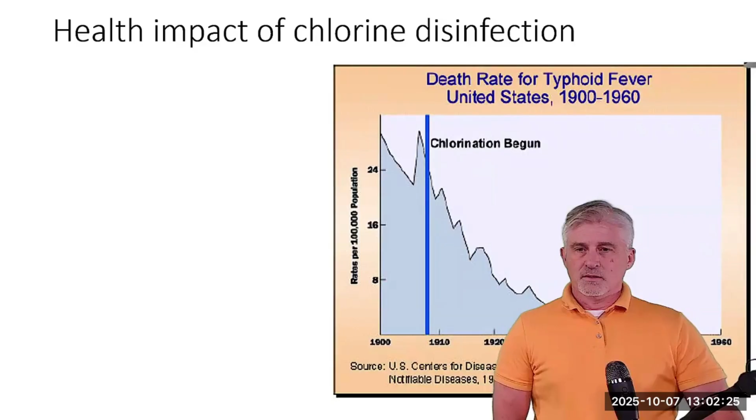So, chlorine disinfection and disinfection byproducts. Why do we add chlorine? You can see from this chart that since we started adding chlorine, there's been a significant decrease in the rate of death from typhoid fever, for example. There used to be thousands of deaths due to waterborne illnesses, but nobody really understood why. In the 1670s, we were first able to observe these microbes using a microscope.

In 1854, John Snow figured out that cholera was caused by waterborne transmission, that it came through the water. That's really interesting. If you can get time and you want to research John Snow and the Broad Street Pump cholera outbreak in London, it was really an interesting thing, and how he determined that the source of this cholera was through drinking water.

In the 1860s, Louis Pasteur developed the germ theory. His theory was that microorganisms such as bacteria and viruses are the primary causes of diseases. Then in 1908, New Jersey had the first system in the US to chlorinate drinking water. You can see where this line signifies 1908. We had some high typhoid fever outbreaks prior, and then through time, with the institution of chlorination in drinking water systems, we've seen that reduce.

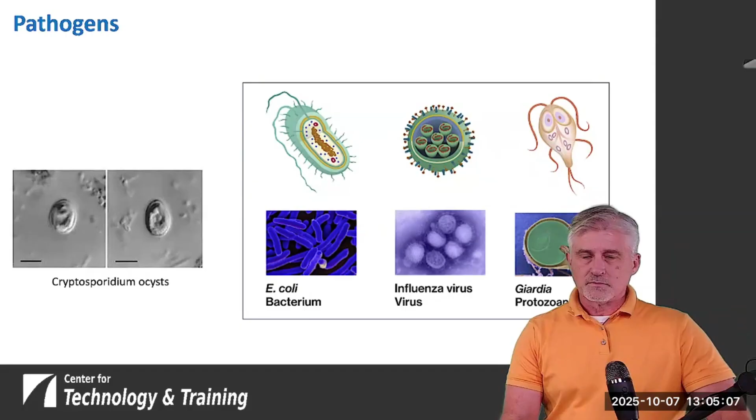So we're using coliform as an indicator organism. The idea is that when we test for total coliform, it's just giving us an idea whether the water possibly contains some of the more concerning things, such as E. coli or fecal coliform. So just because a test comes back positive for total coliform doesn't mean that it's dangerous. It's just an indicator that maybe we need to do some additional investigation.

And now, E. coli has an MCL under the revised total coliform rule. So if you were to have a test for total coliform done, and it came back positive, you would have to follow up with an E. coli test to confirm that you didn't exceed the MCL.

Another method, an indicator that we can use, is monitoring for heterotrophic bacteria. Heterotrophic plate count is an indication of background levels of microbial activity. But once again, it doesn't indicate for certain that we have a problem, it just indicates that there could be a problem.

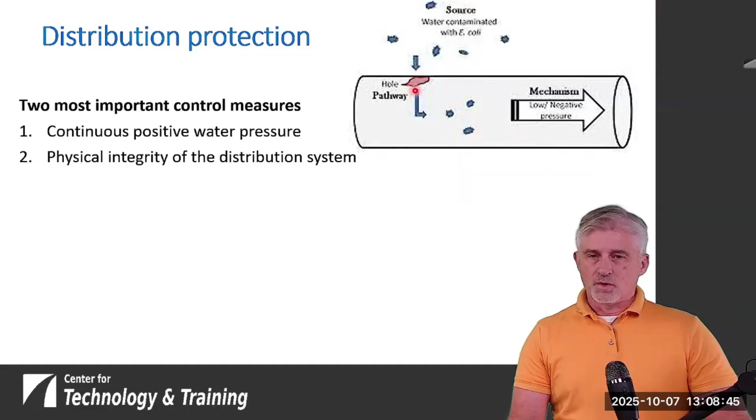And the other thing is to maintain the physical integrity of the distribution system. That means we don't have holes or leaks in our pipes. Even a small crack can provide a pathway for soil containing large numbers of bacteria to enter the system during a low pressure event.

Cross connections are another way that things can enter. If you had some sort of organic that came in, it could potentially be food for any of the bugs that we have. And then a free chlorine residual is the final backup barrier to protect our drinking water if something were to enter through this. So we want to make sure that we've got continuous positive pressure, that our system is tight, that it doesn't have any leaks, and that we have a free chlorine residual.

And the chlorine residual is great, but if we're in a situation where we've got something that gets into our distribution system and we use up all our chlorine, then there isn't any more available to act on any more of the bugs.

All right, so there's three main types of chlorine disinfectant. We've got gas chlorine. Gas chlorine comes in cylinders, it's 100% available strength, and it's a very, very potent disinfectant form of chlorine.

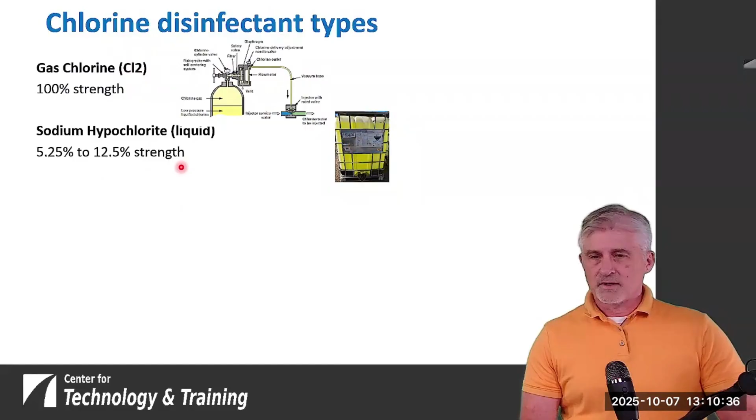We've got sodium hypochlorite or liquid chlorine, comes in these type of plastic totes. They come in 55-gallon drums, and it comes in smaller drums as well. That's usually 5.25 to 12.5% strength. My experience is it tends to be more on the 12.5, the higher end of that.

So free chlorine, when we talk about free chlorine, it's made up of two different things. There's hypochlorous acid and a hypochlorite ion. We'll get into that a little more further about what the benefits of each of those are.

And then chloramines, it's a fourth, it's a little different, it's not actually just chlorine. With chloramines, we're going to take 5 parts of chlorine, we're going to add ammonia to it, and so we're going to measure that as a combined or a total residual. So it's a little different, it's taking chlorine, adding ammonia, and then that's our disinfectant.

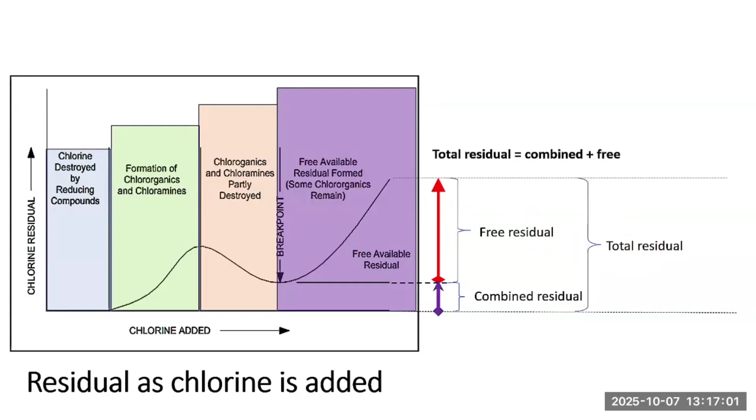Let's look at this in more detail with some numbers. If our dose, what we want to apply, is going to be equal to our demand, and that demand is a combination of the chlorine being used up by reducing compounds plus the combined chlorine, which is the chloramines being affected, that'll leave us with a free residual chlorine. In this case, we dose at 1.5 parts per million. We've got a free residual remaining of 1 part per million, so we know our demand was 0.5 parts per million.

So we're on to our first poll: what dosage should be applied to drinking water with a total demand of 0.4 milligrams per liter or parts per million, if the intended free residual is 1.2 milligrams per liter? All right, we're starting to get responses.

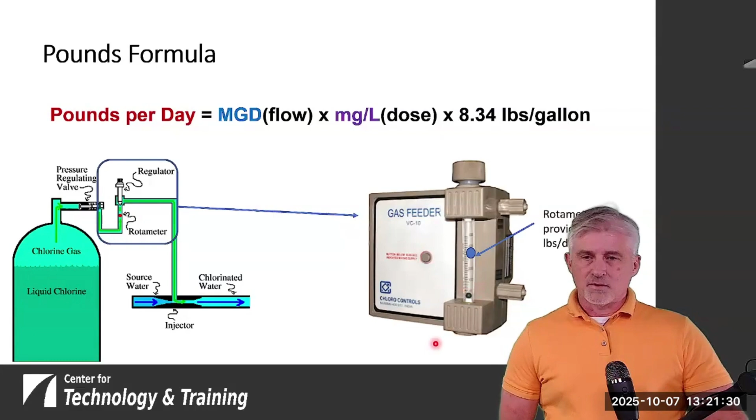So in the case of a gas chlorine system, we've got this gas feeder called a rotameter, and it will provide us the ability to enter in what we want as far as the number of pounds that it will apply in a day. So that's how we work it for gas chlorine. And we can do a gas chlorine feed rate calculation.

So in this calculation, what is the feed rate setting for gas chlorine in pounds per day if the plant flow is 1.2 million gallons a day and the required dosage concentration is 1.5 milligrams per liter? In our pounds formula, we're going to plug 1.2 million gallons per day in for flow, and we're going to have 1.5 parts per million for the dosage, and our 8.34 does not change.

So if we're looking for the chlorine feed in pounds per day, we've got 1.2 million gallons per day times 1.5 parts per million times 8.34 pounds per gallon. We multiply those out, and we get 15 pounds per day.

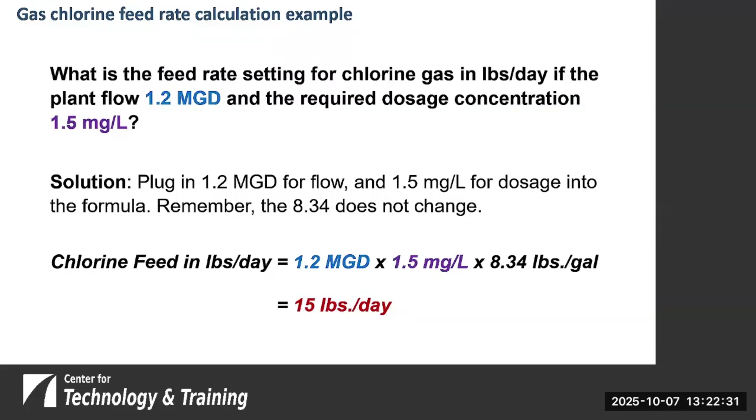All right, so next we're going to look at calculating feed rates for sodium hypochlorite, or liquid chlorine. This is a little different because with gas chlorine, we had 100% strength, so we didn't have to deal with percent strength. We still have the same equation on top, and that's going to calculate the pure chlorine.

The bottom, we're looking at the percent strength. We need to account for the fact that it's not 100%. And then we're going to divide by the weight per gallon, and that'll give you the number of gallons you needed per day. So the weight per gallon in our equation is for chlorine, and for any other chemical, like phosphate, you can use the same formula, but you need to take into consideration the percent strength and the specific gravity of the chemical you're adding.

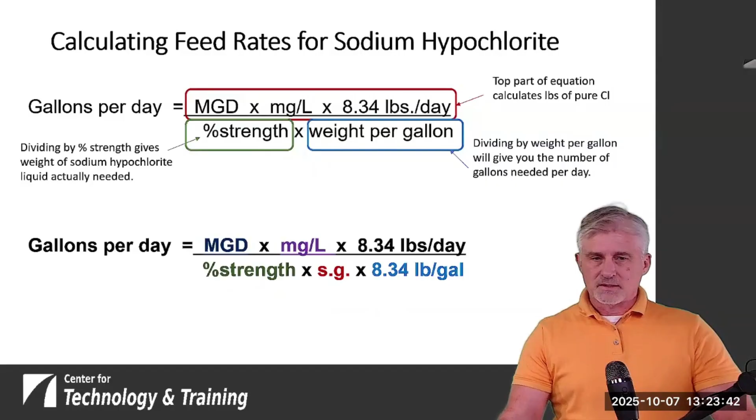So the specific gravity is the comparison of the weight of that material or compound, that chemical, in comparison to the weight of water. So if you have a specific gravity less than 1, that means it's lighter than water. And if it's greater than 1, then it's heavier than water. Water's specific gravity is 1. All right, so that's going to make our equation a little bit different.

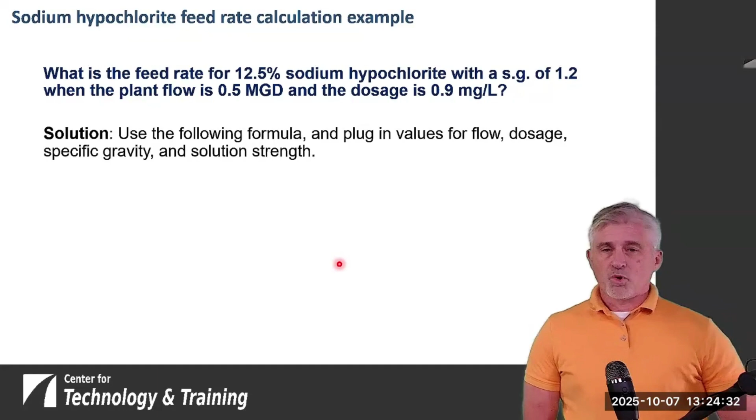So in this example, we have a feed rate for 12.5% liquid chlorine. We're saying that liquid chlorine has a specific gravity of 1.2. We have a plant flow of 500,000 gallons a day, and we want a dosage of 0.9 parts per million. So we're going to use the pounds formula.

We're going to plug it in. We're also going to take into consideration that we have to put in our percent strength and our specific gravity in this case. So our flow is 500,000 gallons a day, our concentration is 0.9 parts per million, we've got the weight of water, our percent strength of 12.5 works out to 0.125, and then we've taken the specific gravity of 1.2, multiplying by the weight of water.

And that gives us 3 gallons per day. So one thing to note here is that if you take this 1.2 and multiply that by 8.34 to determine the actual weight per gallon, pounds per gallon of chlorine, you'll find out that it's roughly 10. So quite often, myself, I just remember that liquid chlorine at 12.5% solution is generally 10 pounds per gallon. So I skip this step when I do it, but you're welcome to keep it in there for yourself if you like.

So if we're feeding liquid chlorine, this is what our pump might look like. This is an LMI positive displacement pump. Note that the placard shows this pump is capable of pumping a maximum of 0.58 gallons per hour, which is important because that helps us determine where we want to set our pump.

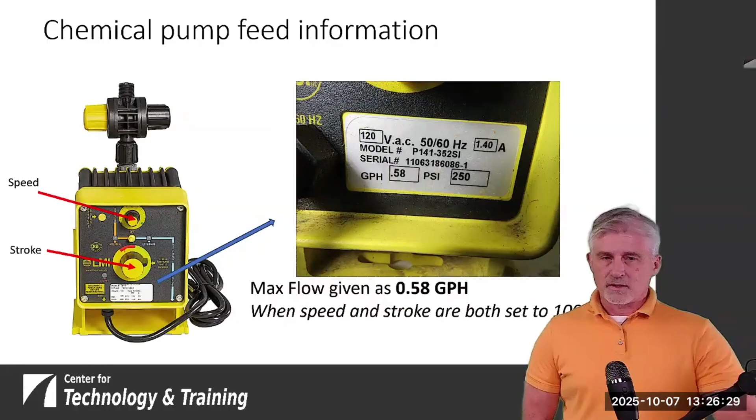So we want to look at a chemical feed pump output. If the chemical feed pump is rated for a maximum flow of 0.58 gallons per hour, what is the actual output of the pump if both the stroke and the speed are set at 70%?

Typically we don't want to run a pump full out at max, because if for some reason we need to add more chlorine than we normally do, we're limited and we can't do that. And we don't want to operate at the bottom, or the minimum, of its range either.

So the actual output is going to be our max output multiplied by the percent stroke and the percent speed. In this case, stroke and speed are both 70%, or for our formula, we'll use 0.7.

0.58 GPH multiplied by 0.7 speed by 0.7 stroke gives us 0.284 gallons per hour. That's about half of what the pump is capable of producing, which is usually a good spot. If you can be there, that allows you plenty of adjustment on the high end or the low end to make that pump work for you.

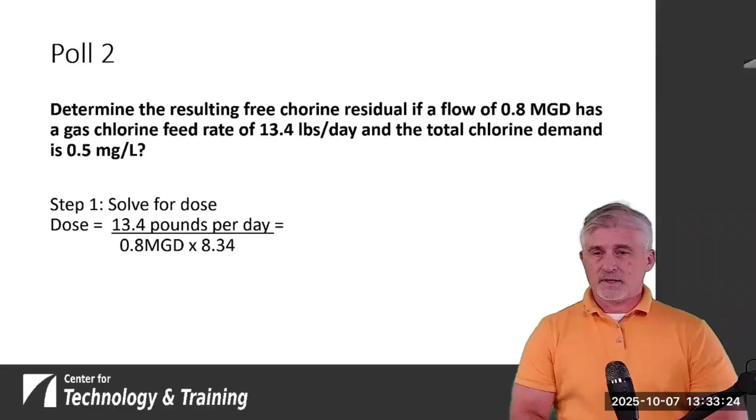So let's see how we come up with our answer. The first thing we do is solve for the dose. To solve for the dose, we take the pounds per day we were given, 13.4, divide that by the flow of 0.8 MGD, and multiply that by the weight of water. So it's 13.4 divided by 0.8 divided by 8.34, and that gives us 2 parts per million, or 2 milligrams per liter, which was answer A.

That's the start, but our next step is to determine the residual. So if we take the half a part per million that was the total chlorine demand, and subtract that from our 2, we get 1.5. You'll notice it's a little tricky with some of these responses, because we gave you the 2, and if you stop there, you might give a different answer, but we have the half a part in here, so it's a bit tricky on those responses.

Okay, so we mentioned the different pathogens - bacteria, virus, and protozoans. One of the important things is that when it comes to bacteria, we actually destroy those. The bacteria are killed through the process of disinfection, whereas viruses and protozoa are just inactivated. They may remain alive, they're just not allowed to replicate or reproduce, so they can't continue to cause problems. So we'll talk about inactivation when it comes to viruses and protozoans.

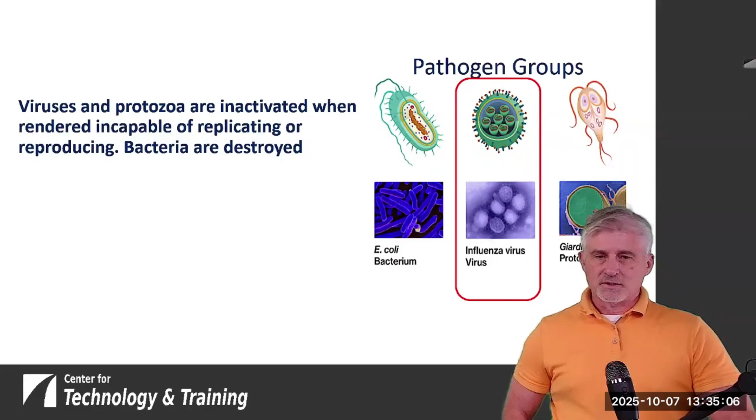So chlorine's effectiveness is based off of two major things. We've talked quite a bit about the residual concentration - we want to have good chlorine residuals out in our distribution system in case there's anything out there that we need it for. But the other key component is contact time. So we have a combination of both the residual concentration and the time for it to act on the bugs.

For viruses, they require 4-log treatment, and it's a combination of both the removal, which could happen at a treatment plant where we're going through different processes to remove the viruses, and the other side is we can get some from inactivation through things such as chlorine. So it's a two-part thing that adds up to that 4-log removal, meaning 99.99% of the viruses were confidently removed through the process. So we want to achieve at least that.

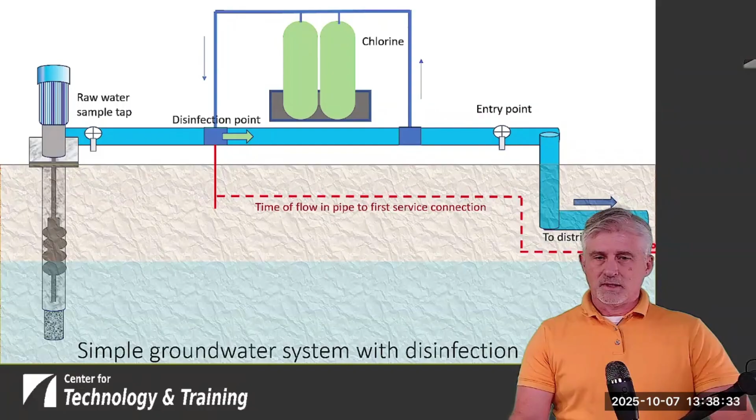So we look at this as a simple groundwater system with disinfection. Our water comes out of the well, it goes through the pipe, chlorine's added, it goes through our entry point - probably our last sampling tap before we leave - the entry point to the distribution system. And so it follows this path. That denotes the time that we are concerned with, that chlorine contacting the water. So it's the time from where the chlorine was added to where the first customer would have the opportunity to consume the water.

So we're going to work through an example problem with contact time at the first connection. In this example, a groundwater system needs to achieve a CT value of 6 milligram-minutes per liter at the first service connection. We've got 500 feet of 8-inch pipe between the point where we add that disinfectant and the first service connection. The flow in that pipe is 250 gallons per minute. The free chlorine residual is 1.5 milligrams per liter.

So our first step, and we did these things yesterday, is to convert from gallons per minute to cubic feet per second. Dividing by 7.48 gives us cubic feet, dividing by 60 gives us flow per second. So: 250 gallons per minute divided by 7.48 gallons per cubic foot, divided by 60 seconds per minute - we get rid of our minutes, we get rid of our gallons, and we end up with 0.557 cubic feet per second.

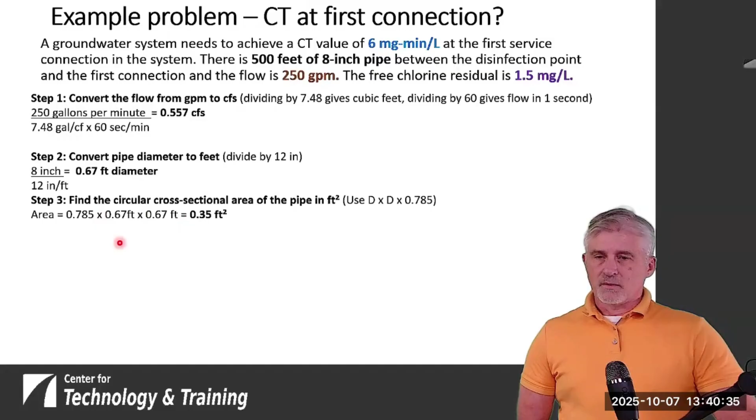Now we're working in cubic feet per second, so we want to convert our pipe diameter from inches into feet, and in doing that we get 0.67 foot of diameter. Now we use our equation to figure out the area: 0.785 times the diameter of 0.67 times the diameter of 0.67. You can see that's going to be in square feet - 0.35 square feet to be exact.

Now we divide the flow that we had in CFS by the area, and that's going to give us a velocity. So if we remember, our flow equals area times velocity, and so we can divide to get our velocity, we divide our flow by our area, and that gives us 1.59 feet per second.

And then we divide the linear foot of the pipe by the velocity to find out what is our contact time. So we know that we've got 500 feet that it's going to travel, and for every second it's going to travel 1.59 feet. That means that if we divide our 1.59 into 500, that's going to give us the number of seconds it takes for water to travel through that pipe.

So we do that, we come up with 314 and a half seconds. Our contact time is, we're concerned about how many minutes it is, so we need to convert that. We'll simply divide the 314 and a half by 60, and that will give us the number of minutes that we have. And then we compare that to what we're given, right?

So we're going to take our 5.24 minutes, the time that we have, and multiply that by the concentration of the chlorine residual, and that'll give us our milligram minutes per liter. It's 7.86. So our 7.86 is greater than our 6 that we were required to have, which means that we have achieved compliance.

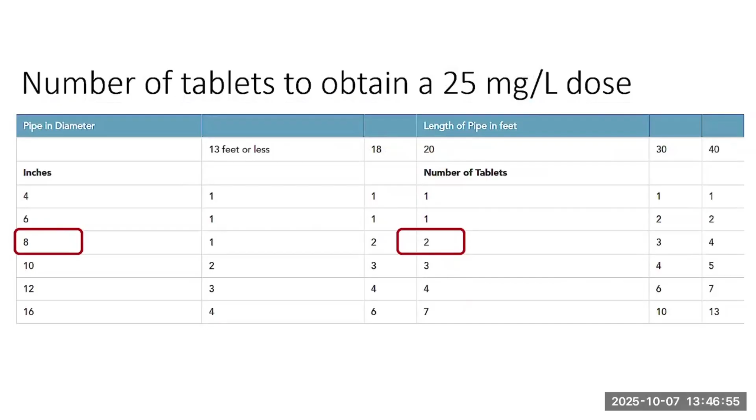This table is beneficial for showing how to dose with HTH or calcium hypochlorite tablets. If we take, for instance, an 8-inch diameter main and our pipe length of 20 feet, it tells us that we should be looking to apply 2 tablets in that water main to obtain our dosage. So there are little tables out there to help with how much to use.

All right, so... emergency. Sorry about that, it's somehow that slide got pushed up ahead of the text on that.

So, emergency disinfection of storage tanks. I had mentioned that AWWA has these standards out there. In the case of disinfection of storage tanks, I recommend you look at AWWA C652-19. Usually the dash signifies the date, because these things get updated and the dates will change. It's always important to find the latest version as they make changes.

Before disinfecting the storage tank, you should make sure it's thoroughly cleaned out. You want to get out any sediment or anything that might have biofilm. You're going to spray the interior surfaces of the tank with a 200 milligram per liter solution, a high chlorine solution, and let it sit for 3 hours. Then you'd rinse down the tank walls and drain it out, and once again dechlorinate the rinse water to make sure you're not causing any harm to the environment when you discharge it.

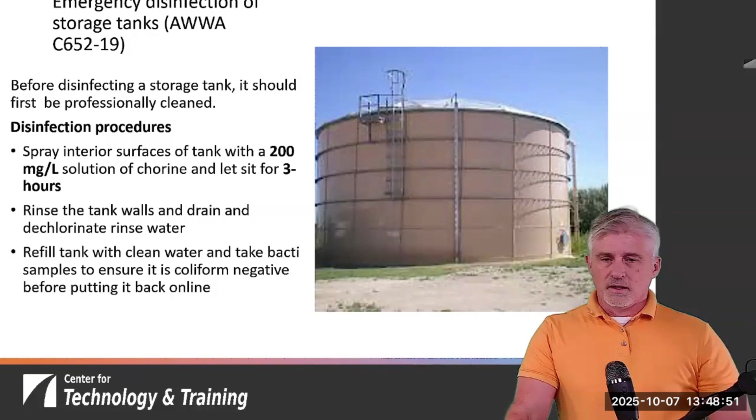The next thing we would look to disinfect, I'd recommend you look to the AWWA standard for a full description of how to go about this, but for wells, you can disinfect with a dose that results in a free chlorine of 50 milligrams per liter, maintained throughout a 24-hour period. With a well, you're looking at disinfecting the area where the water is. Quite often you don't want to chlorinate an area where there's no water, so we're dosing for the area that we actually have water in the well, that water column.

We can calculate the volume of water in the casing in million gallons, and we can calculate the gallons of sodium hypochlorite or liquid chlorine needed for our dose, which would be just above 50 parts per million to account for reducing compounds and chlorine decay. After 24 hours, the chlorine levels will dissipate, so we take both of those things into consideration.

At the end of the disinfection period, we're going to turn the pump on, flush that water out, dechlorinate it, and send it to waste as well. After you get the water fully flushed out, you don't want any chlorine remaining in the water, so you'd take a test of the raw water without chlorine and see if you've got negative bac-T samples.

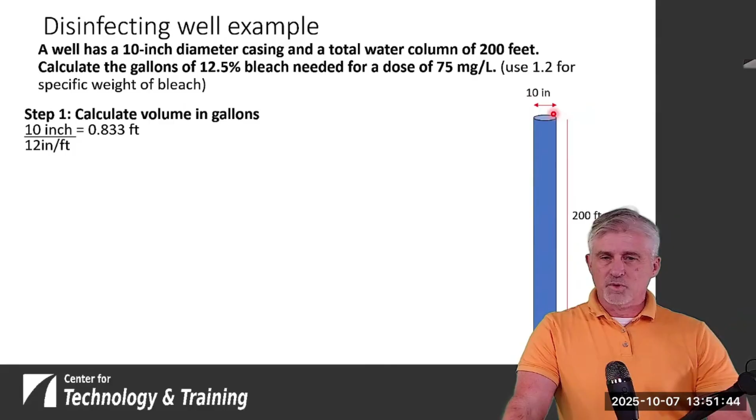We go back to our volume of a cylinder formula, and we start by converting. We need to find our volume, so we convert our 10 inches over to feet, dividing by 12, which gives us 0.833 feet. Now we take our area, multiplying 0.785 times 0.833 times 0.833, times the length or height of the casing, which is 200 feet.

We multiply that by the number of gallons per cubic foot to get rid of our feet and convert it into gallons. Going through those steps, we end up with just under 815 gallons in that 200-foot casing that's 10 inches in diameter.

So now, the next step, we convert that into million gallons by dividing our 815 gallons by a million gallons, which is the same as dividing by 1,000,000, allowing us to move our decimals over. This gives us 0.000815 million gallons.

So now we can take that and enter it in. We multiply our number of million gallons by the dose we need of 75 parts per million, then multiply that by 8.34 pounds per gallon. We divide all of this by the percent concentration, in this case 12.5%, which works out to 0.125% liquid chlorine. We multiply by the specific gravity of 1.2, and by the weight of water in pounds per gallon, which equals 10. If you wanted to, you could throw that in there, and you'd get pretty much the same answer: 0.408 gallons.

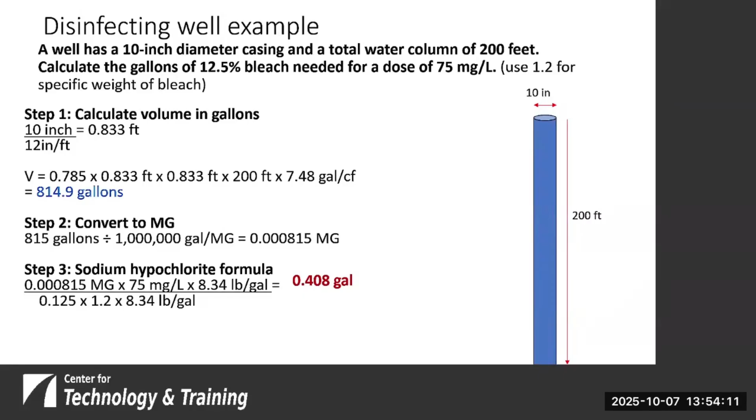So the next topic we're going to cover is disinfection byproducts. This is an important part of the chlorination process. Unfortunately, we end up with these byproducts, which can cause some health concerns. So how do they form?

After we go through our other treatments, we add chlorine because we want to make sure we end up with a residual out in the distribution system. But that chlorine reacts with those organics and forms disinfection byproducts. Unfortunately, they end up going out into the distribution system, and over time, the chlorine residuals continue to form disinfection byproducts out in the system. So the process of forming them doesn't just start where we apply the chlorine—through time it continues.

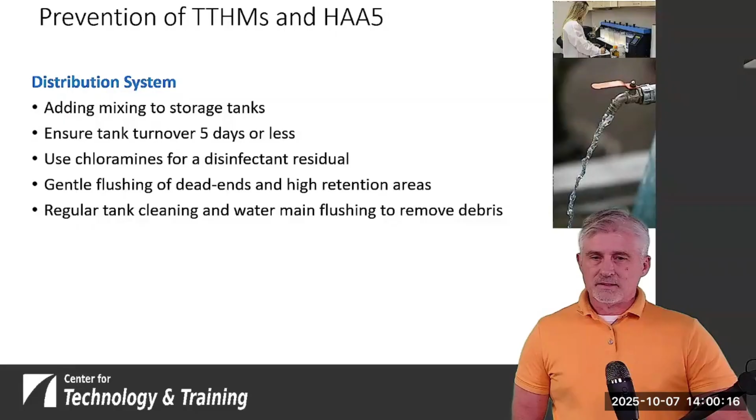If we regularly clean our tanks, removing sediment, and flush water mains to remove debris, that's important because sediment and debris has the potential to harbor naturally occurring matter. If we can get it out of the system, hopefully we're less likely to form THMs and HAAs.

So we talked about this idea of water age and the time that water might be in a storage tank or in the distribution system. Where do we have higher retention times? What are the areas where we might expect this to be a problem?

Well, large diameter mains are one, because they're big, there's more water in them, and they're almost like a storage tank to some extent. This can happen especially if they were over-designed, or maybe things changed and they were properly designed at the time, but now we have less water use in that area.

Any mains that serve areas with low usage—why would you have a main that serves low usage, that doesn't serve very much? It could be that a factory was located there, and the mains were properly sized with a lot of use, and then that factory went away.

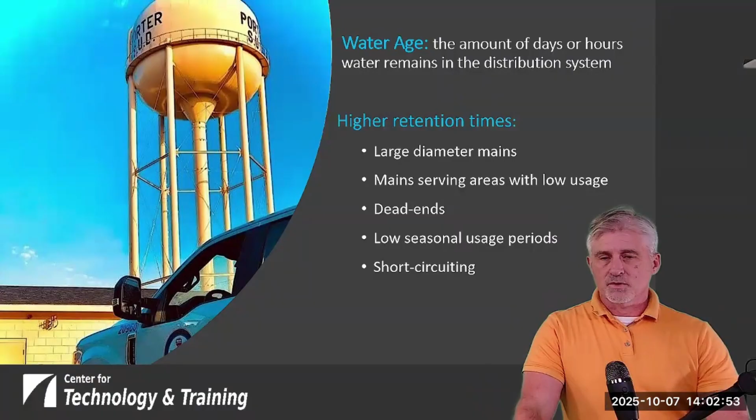And then finally, short circuiting—the water has two different routes to get somewhere, and it always goes the same route, so the water on the other side doesn't get used. You can also have short circuiting within a tank itself. We'll talk further about that.

Nitrification is another topic. It's a microbial process where ammonia-oxidizing bacteria convert ammonia into nitrite, and that nitrite is then oxidized to nitrate by nitrite-oxidizing bacteria.

So what are the impacts of nitrification? You end up with high nitrate levels, a loss of disinfection residual, which is not good, and bacterial growth. All of those are things we definitely don't want happening in our distribution system.

Factors that can lead to nitrification: we said to avoid THMs and HAAs we could use chloramines, but now chloramines have the potential to lead to nitrification. Ammonia, in this case, is a food source for bacteria, and that's not good.

Warmer temperatures can lead to nitrification as well. Sediments out in the system that hold bacteria can lead to nitrification. And a significant drop in pH and alkalinity can have effects with nitrification.

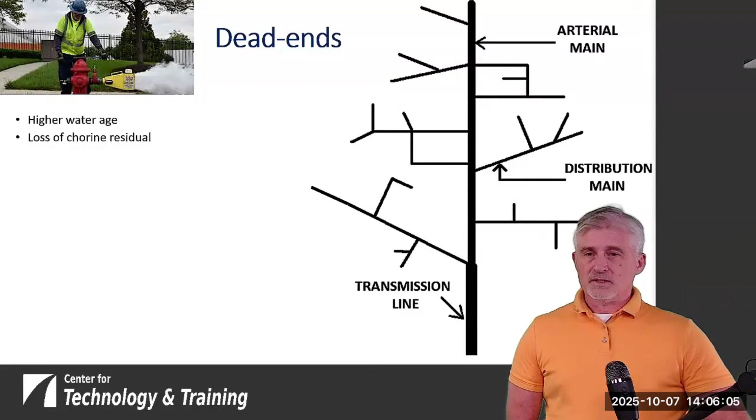You're also going to have, because the water's not flowing, it's going to allow any sediment to drop out in the pipe.

Also, with lower chlorine residuals and lower flows, we're going to see an increase in biofilm growth. Scale will be allowed to form as that same water sits in the pipe. The scales can build up, and we're going to have an increase in DBPs. Disinfection byproducts will increase in dead end areas.

So these are the areas that we're looking at as considered to be dead ends. I would consider a lot of this to be dead ends in this scenario. There's an example. Maybe there's a plant at the end of that that helps keep that dead end from being an issue.

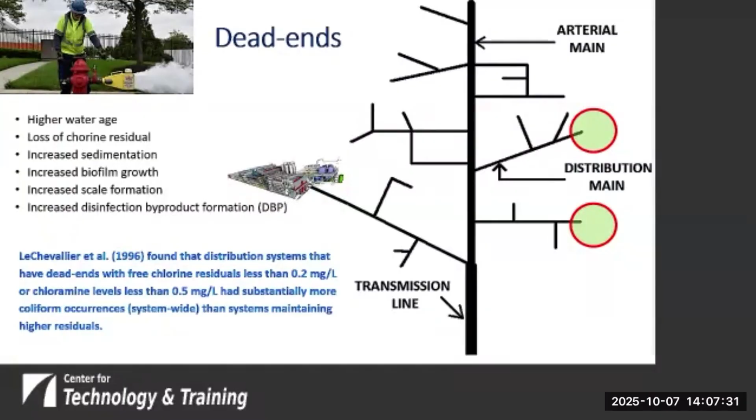There's a study that found that distribution systems with dead ends having free chlorine residuals less than 0.2 parts per million, or chloramine levels less than half a part per million, had substantially more coliform occurrences system-wide than systems maintaining higher residuals. So this just points to the fact that we want to keep those residuals up, especially if we have dead ends.

What are the effects of increased water age?

There's another study, the effects of residence time on water quality in large water distribution systems, done in 2013. In that study, researchers found that areas with low velocities had issues both with heterotrophic plate bacterial growth, and the levels of THMs continued to increase with water age, regardless of the presence of normal chlorine residual levels. So it became a problem that normal chlorine residuals couldn't solve.

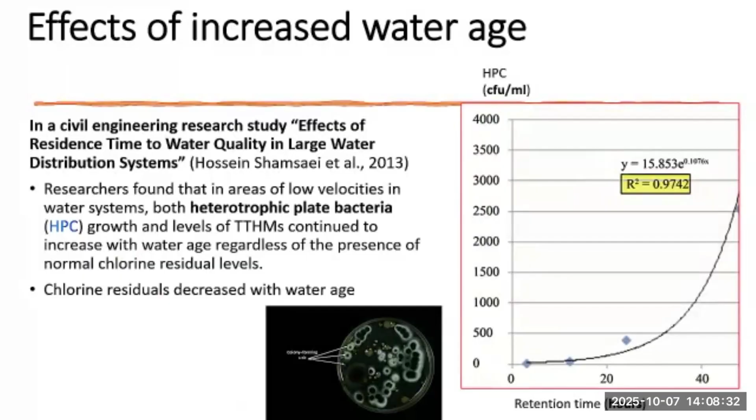Chlorine residuals decreased with water age. That's something we'd normally expect. The HPC numbers estimate the number of bacteria, yeasts, and molds that might be present, so it's not just bacteria. HPC is noted in colony forming units per milliliter. As the retention time increased, we saw an increase in the formation of these HPCs.

This chart helps show what happens through time with both THMs and chlorine residuals. As time goes on, our chlorine residuals drop. In this case, we were at just over 5, and now we're down to just over 1, so we've seen a significant decrease in chlorine residuals. But in the same time, we've seen an increase in the THM levels. So as time passes in a distribution system, chlorine residuals decrease and THMs increase.

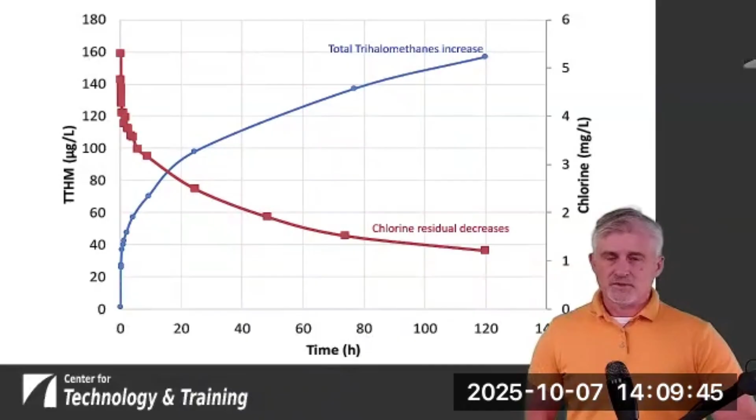So what's the benefit of storage tank turnover? What is storage tank turnover? It's the idea that we replace the water in the tank with fresh water. The water that's in the tank leaves the tank, and turnover is the time it takes for all of the water to be exchanged.

For best operations, we want that turnover to be less than 5 days, so we can keep that chlorine residual up and keep the water moving. It's less likely to cause issues. But as we've talked about in other instances, there's a balance. We can have an enormous tank because we need so much capacity for peak flows and higher usage times, but we need to minimize our age and make sure we have turnover. So it's a balancing act to have the right size tank.

In some instances, operations of storage tanks will, at different times of the year, use less of the tank, just to make sure that they have the proper exchange.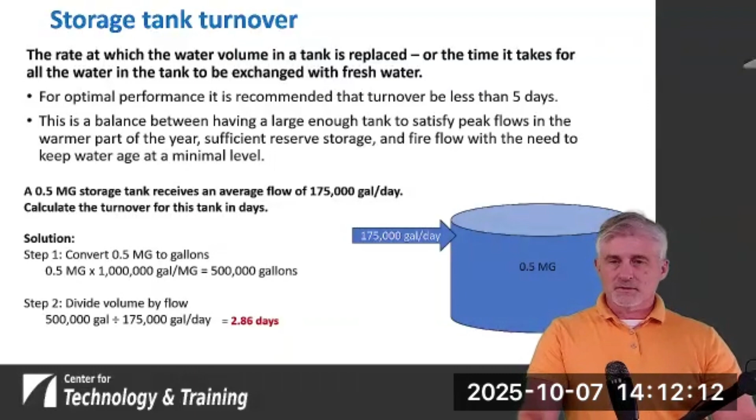This is under the assumption that all the water that goes in comes out, there's no short circuiting. So we convert the 0.5 million gallons to gallons, which is still 500,000 gallons. We divide the volume by the flow, so we divide that 500,000 gallons by 175,000 gallons a day. That tells us it takes 2.86 days, for the water that enters today, it'll be 2.86 days before that water leaves the tank.

So, short circuiting and tank mixers. As we can see, what happens is that the lighter, warmer water tends to be lighter and sits on top, and the colder water is heavier and sits on the bottom. I'm sure most people have seen that if they've jumped in a lake in the summer. The surface water at the top is warm, and down below it's cooler. It tends to stratify in different layers.

So if we have our inlet to our tank at the top, and our outlet at the bottom, the water that comes in is typically colder than the water already in the tank. So in theory, what should happen is that water drops to the bottom, and since it's cold, it's likely to be the water that leaves first. That's the idea of short circuiting - this entering water doesn't spend time in the tank, it just goes right through. That means the lighter, warmer water at the top is probably going to stay.

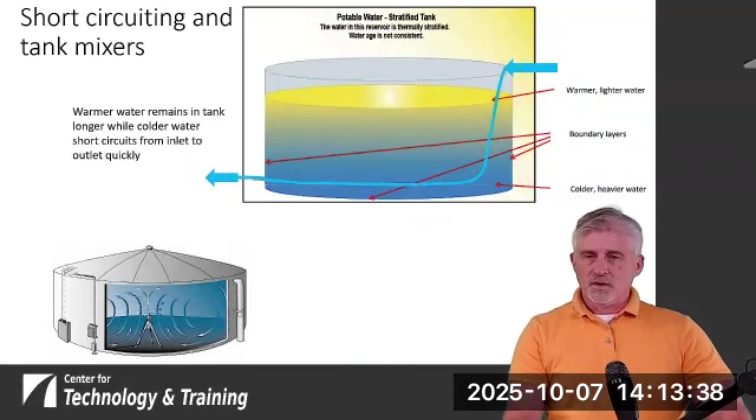So that's short circuiting, and mixing can be done in a multitude of different ways. You can add air that moves the water around, or have it enter so that it circulates. These are all good ways to ensure we don't have stagnant water or water that sits. The water gets mixed, so it's overall better.

So let's look now at the effects of disinfection on biofilm, and what its relationships are to DBPs, disinfection byproducts. We can't have just one thing - we've got to balance everything.

If we look at our pipe, we've got naturally occurring organic matter. It comes in, combines with the chlorine, and we create disinfection byproducts. We've also got biomass that becomes detached - it reacts with the chlorine and creates disinfection byproducts. We know chlorine can reduce biofilm growth rate and can even destroy biofilms, but it does create disinfection byproducts.

So there's a recent study where they observed low disinfection byproduct formation with a chlorine residual of 0.5 parts per million. When they increased the chlorine residual to 2 parts per million, those DBP concentrations went up and then eventually decreased over a time of about 2 years. So what happened to cause that?

They believe that when the free chlorine at 2 parts per million was effective, it was able to get into the extracellular polymeric substance - this layer on the outside of the biofilm. It was able to penetrate into that, which led to an initial time where we saw an increase in disinfection byproducts. But as it broke through there and got rid of the biofilm, the thought is that water gets used, goes through the system, and now we're in a better spot because we've gotten rid of the biofilm. We went through our little spot of elevated DBPs, and now we're good.

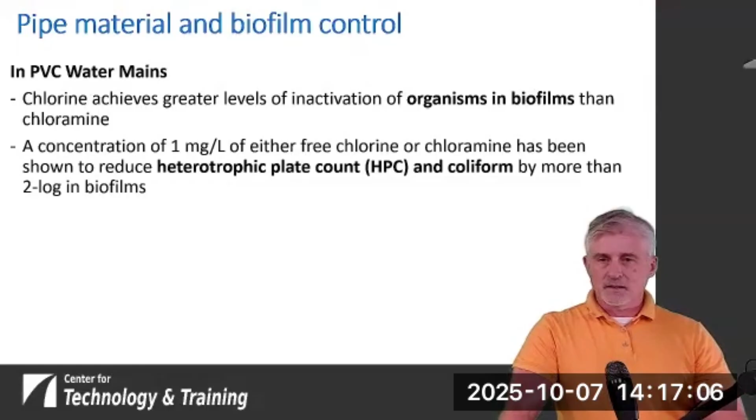A concentration of 1 part per million of either free chlorine or chloramine has been shown to reduce HPC counts and coliform counts by more than 2 log in biofilms. So that magic number is 1 part per million.

Now in iron water mains - Greg showed you before the slide with the tuberculated cast iron water main on the inside - quite often we see a higher chlorine demand based on the sediments and the tuberculation. Free chlorine residuals as high as 4 parts per million have shown to be ineffective for iron water mains. So that tells us that even at really high levels, chlorine doesn't always do the greatest job on those biofilms. Monochloramine residuals greater than 2 parts per million have been shown to be successful at reducing them. So it depends on what we have - that determines quite often what we need to do.

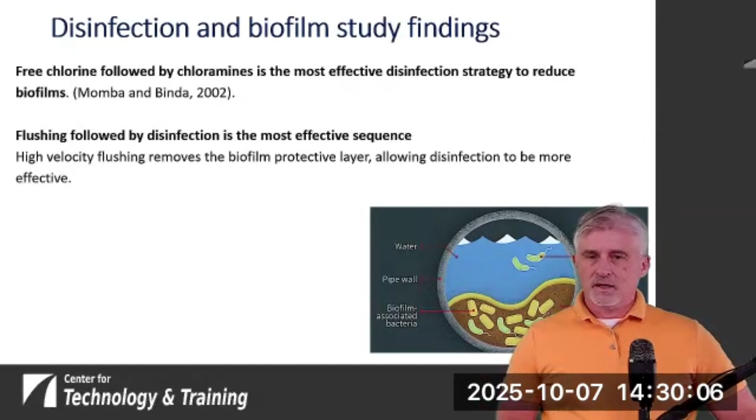So we've got to look at disinfection and biofilm study findings. There have been some studies done regarding disinfection and biofilm, and one of them done in 2002 looked at free chlorine followed by chloramines as being the most effective disinfection strategy to reduce biofilms. That all sounds great, but now we're dealing with free chlorine and chloramines, I would imagine that the regulators are going to require you to do the necessary testing for both of those. It just becomes pretty burdensome. Flushing followed by disinfection is the most effective sequence.

So if we're going to do this, we're best off to do our high velocity flushing first and then disinfect afterwards. And just a word of warning, if you're going to change any of your treatment processes at all, including disinfection, you need to thoroughly investigate and pilot test it. I would think that the state regulators would look at that and say that it's a change in treatment, so you'd also have to get it okayed by them, potentially get a permit to do that. So here's another one of those good EPA guidance manuals. I encourage you, if you're interested in disinfection profiling and benchmarking, that you look at that.

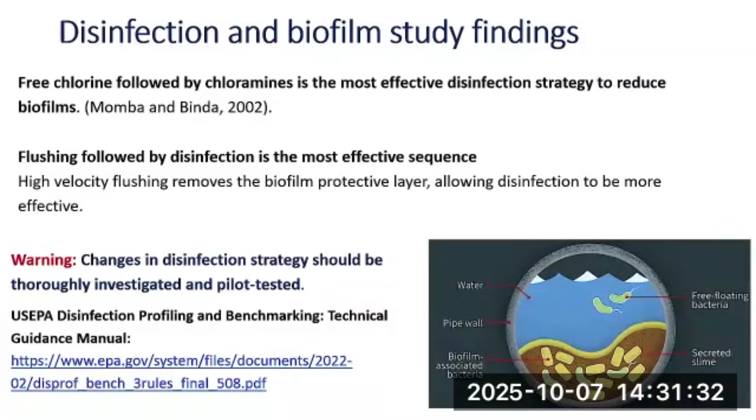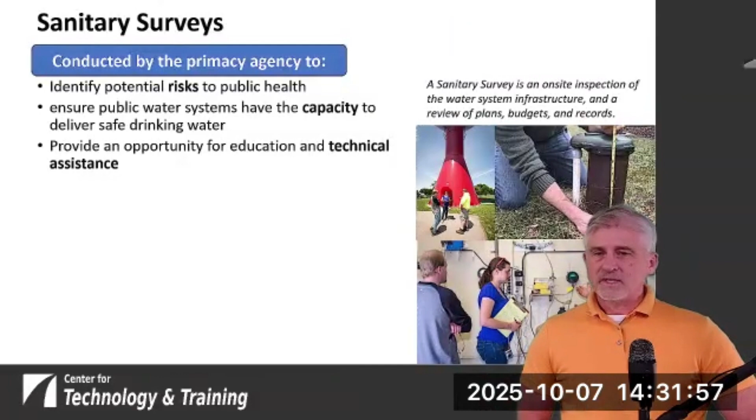So now we're going to move on to sanitary surveys. It's quite often one of the scary things, I think, for water system operators is the idea that regulators are going to come out and do a survey of your system. I would hope that that's not the case, that you have no real reason to be concerned. The reason they're out there doing these is they want to identify if there's any potential problems, any risk to public health. They want to make sure that your system has the capacity to provide safe drinking water to its consumers. And it's an opportunity for some education and technical assistance.

It gives the regulators an opportunity to see everything that's going on in the system. Hopefully they can provide some tidbits of knowledge and assist you in any issues or concerns that you might have. It's an inspection of the entire water system. We're going to look at all sorts of things when we come out to do a sanitary survey.

Why do we do it? The Safe Drinking Water Act requires it. For surface water treatment systems, it's under the interim enhanced surface water treatment rule. For groundwater systems, it's required under the groundwater rule. Community water systems are required to have a sanitary survey done every 3 years, and the non-community water systems are required every 5.

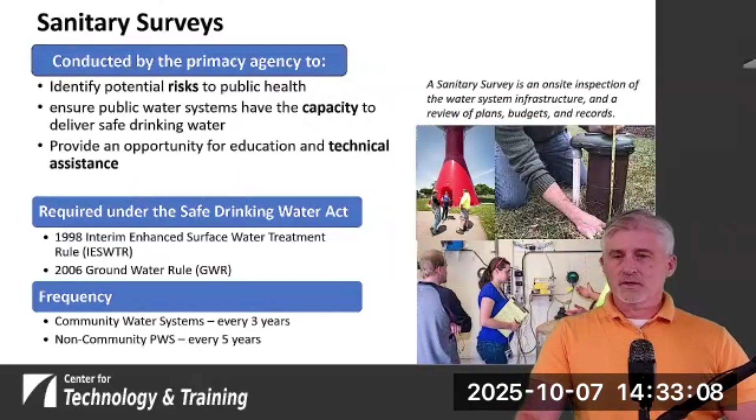So what different things do we look at when a sanitary survey is conducted by a regulator? We're going to look at the water source. We're going to look at the different treatment processes. We're going to look at the entire distribution system, including the finished water storage. We're going to look at the pumping and controls. We're going to look at the monitoring and reporting that's done by the system, what sampling they are doing and how they are reporting it. We're looking at the system management and operations, how that system is run. And then we're also going to look at operator compliance, so that includes having properly licensed operators, having enough operators, and things of that nature.

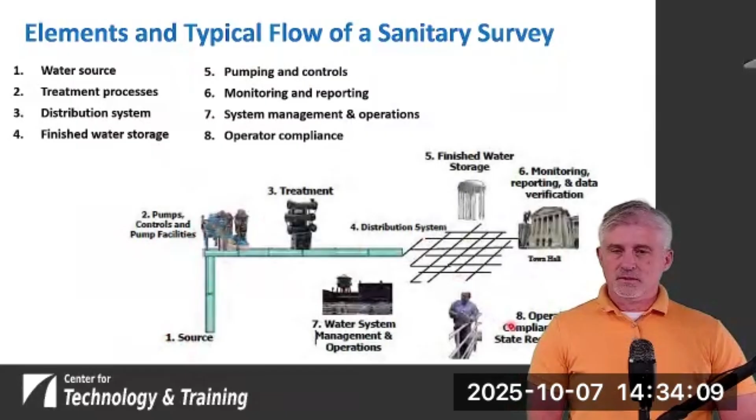So we're going all the way from source through the whole distribution system, including these other items. So what are the processes? What can you expect if your state primacy agency is coming out to do a sanitary survey?

First of all, I would encourage you to make sure that all your records, anything they might be looking for, are readily available so you can show them when they come out. You need to be prepared to give a tour of your system. If you've got a treatment plant or a well house, I would expect they'd want to see those. If you've got storage tanks in the system, they'd probably want to look at those to the extent they can.

After the survey, you can expect they'll provide you with a detailed letter showing their findings and any recommendations they have. If there are sanitary deficiencies, they're going to list those as well, and they're also going to tell you what time frame they expect you to correct those deficiencies.

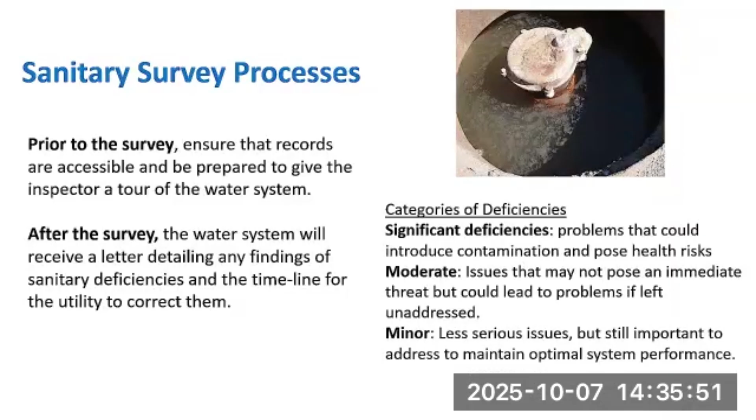So there are three different categories of deficiencies. We start with significant deficiencies, the most important ones—problems that could cause public health concerns or introduce contamination. Moderate ones could lead to problems if you don't address them, but there's nothing really immediate. And minor ones are things that would usually be helpful to know to aid you in operating your system and making it work most efficiently.

So let's look at water source. These are all examples we see here of well casings, and we're looking to make sure you've got proper wellhead construction. In this case, wells aren't located too close to water bodies or contamination sources. Do you have a good source protection program?

This photo shows the cap is broken on this well casing—obviously it allows all sorts of things to get in there. The next one, the casing doesn't extend the proper height. The recommendation for casings above ground are determined by the state well construction standards, but typically a minimum of 18 inches above grade is required.

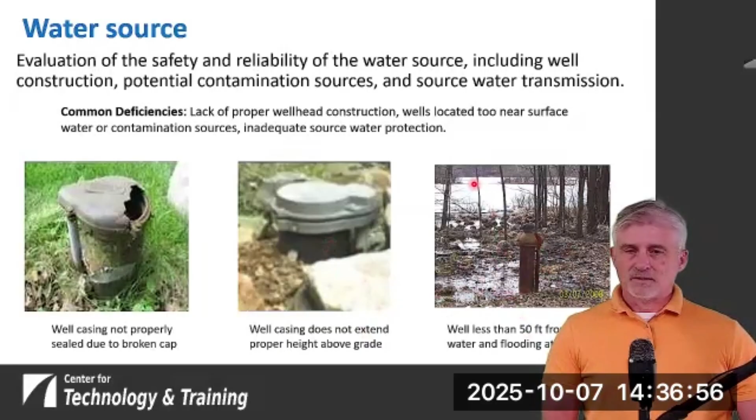And in this last one, obviously this well's got standing, ponding water here. It's very close to a water source, so this type of well would be difficult to isolate to be certain that we're not influenced by this water body as well.

For treatment, we're going to look at all the different treatment processes. We need to make sure you have points where you can add your chemicals, collect samples, and store your chemicals. You need to use the proper NSF-approved chemicals.

If you look at this, both of these photos show the potential for backflow issues. Here we've got something piped directly into the drain—it doesn't show where that pipe comes from. In this case, it appears there are two chemicals placed at the same point, so it's possible for them to backflow. You could put one chemical into the other, and they may not be compatible that way.

There are a lot of different things that can be looked at. One issue I personally was involved with was with the filling of a day tank, which resulted in a chemical being overfilled in that day tank. It ended up going into the wet well and through the treatment process. Those are the type of things that hopefully are avoidable—this is information the regulator might be able to identify and help you with.

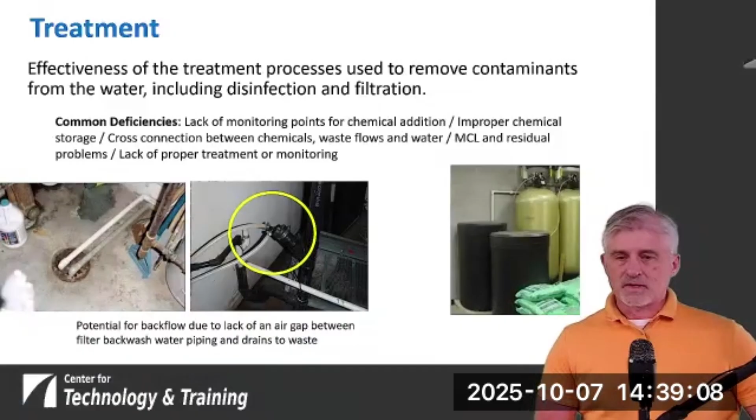In that case, they ended up installing a dead man switch so the operator could no longer walk away and leave that pump operating. He had to stay until the tank was full, so it only operated when he was there. There are a lot of beneficial things that can come out of these sanitary surveys.

As I said, any chemicals need to be NSF approved and properly stored. In the distribution system, we're going to look at the entire thing. Do you have a lot of dead ends? Do you have cast iron pipes? Do you typically have a lot of main breaks? Is there a need to replace infrastructure?

Do you have a cross connection control program, and are you following that? Are you performing those inspections? Do your valves and hydrants work properly? Are you exercising your valves? Are you flushing your hydrants? Are you doing routine maintenance on those hydrants?

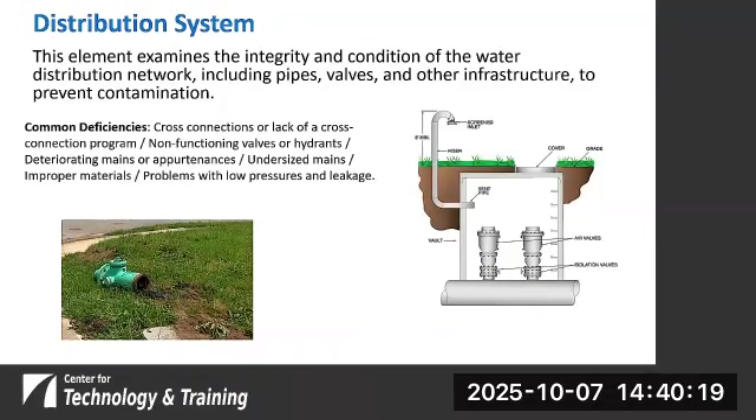Do you have proper flows? Is there any issues? What is your leakage? If you compare the amount of water that you pump from your wells compared to what you sell, are those numbers in line?

This is a very obvious one, a broken fire hydrant. I don't imagine that I'd ever see that when doing a sanitary survey, because people typically pick those up so you wouldn't leave that there.

And then, finished water storage, so our storage tanks. With this, we're going to look to evaluate the conditions that we can.

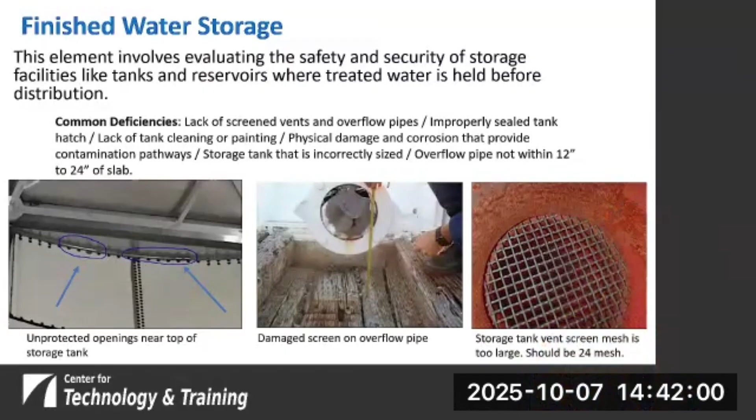So you look at the pumps, make sure that you're providing proper maintenance on the pumps, that they work properly, and that you have redundancy.

It's important that you have more than one pump, because if that pump fails, if you only have one and it fails, you're not going to be able to provide necessary water for your consumers.

It would probably cause valves and meters to corrode and rust prematurely. You would hope there weren't any leaks in that, but if there were, now you're subject to potential backflow.

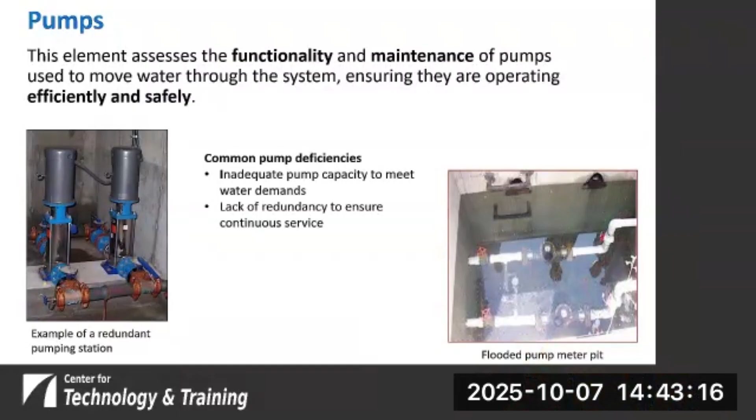So these are all a number of reasons why you wouldn't want to have that type of situation. So we said, you're going to have firm capacity of your pumps, redundancy. You don't want pumps that cycle too frequently, because that can cause wear, temperature issues.

You need to have proper screening on your pumps to make sure that's not a safety issue. Is there any histories of outages or low pressures in your system?

And then on to operator compliance. So with operator compliance, you want to make sure that they've got properly licensed operators, that those operators are receiving the training that they need.

So that they can manage and maintain the water system. States will quite often have operator certifications that are dependent or required based off the type of treatment or distribution system, quite often based off the size within those classifications.

And then do you have enough staff to operate and maintain the system? If you're required to have 24-hour-a-day operations, do you have enough staff to run the plant 24 hours a day?

And then to operate the system, you need to undergo training. Most operator certification programs in states require continuing education credits or hours or whatever the term may be, in order to renew those licenses.

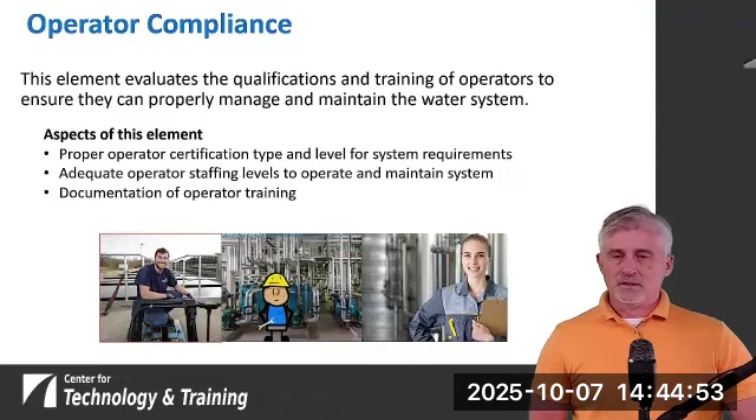So are you receiving the proper training? And do you have documentation of such?

Management and operations is a lot of that's the paperwork stuff. Most of the in the field, in the plant operators don't end up having to deal with this, but we'll look at those type of things.

Your record keeping, your planning type stuff. Do you have the policies and ordinances in place that are necessary and allow you to properly operate the system?

Do you have the finances set up? Are your rates such that you can maintain the system and provide for capital improvements?

What's your system service area? Where do you serve? Are you doing asset management planning so you know what needs to be replaced, what your priorities are, and have you done an emergency response plan?

Proper public notification, including the consumer confidence report. That's probably the most obvious, but also if you have a violation of any sort, monitoring or reporting violation that you have to notify the public about. And then once again, cross connection control records and your program.

Typically, they would like you to have available any of the previous sanitary surveys, and that would quite often be based off a record retention requirement. And then the same with permits - if the regulatory agency issued permits to you, do you have those on file if they were to ask for them?

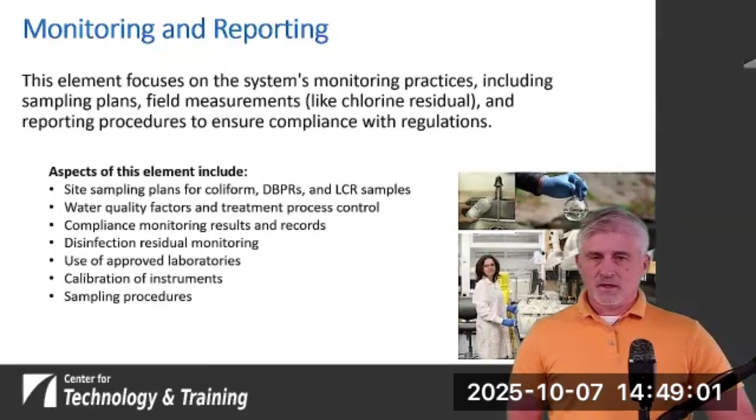All right, so I wanted to poll number 4. Which of the following do you think is a tier 1 sanitary deficiency? If you remember, tier 1 is the most serious sanitary deficiency. So is that a water operator has not attended a training in the last 10 months? The end of a tank overflow pipe is 20 inches from the concrete pad? A well casing does not have a sanitary seal? Or the system is understaffed?

We get up to a certain percentage, we get a good deal of these coming in, and we will end the poll.

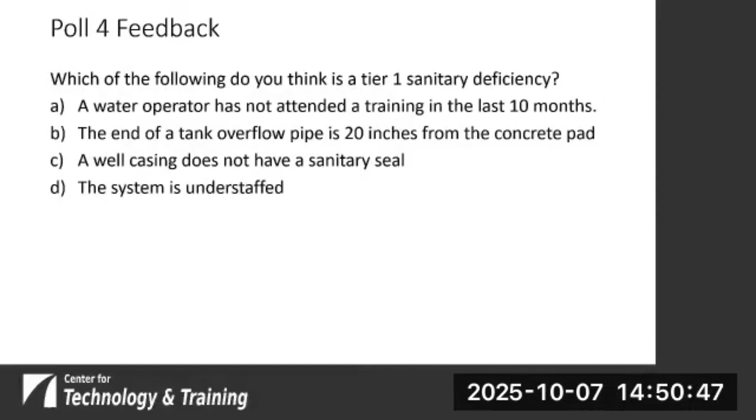Okay, it looks like 77 to 79% of the people have responded, so I'm going to end the poll and share the results with you all. It looks like 85% of the people have indicated that they think it's a well casing that does not have a sanitary seal. 14% said the system's understaffed, and 2% said the end of a tank overflow pipe is 20 inches from the concrete pad. And yeah, all of these things could be issues.

I think that the most serious issue is a well casing that does not have a sanitary seal. That's important because it could allow contaminants to enter the well, which could directly result in a public health concern.

Okay, so we're on our last topic, sampling and monitoring. Let's look at why we monitor chlorine results. There's a few different reasons that it's important to monitor chlorine results, or residuals, excuse me.

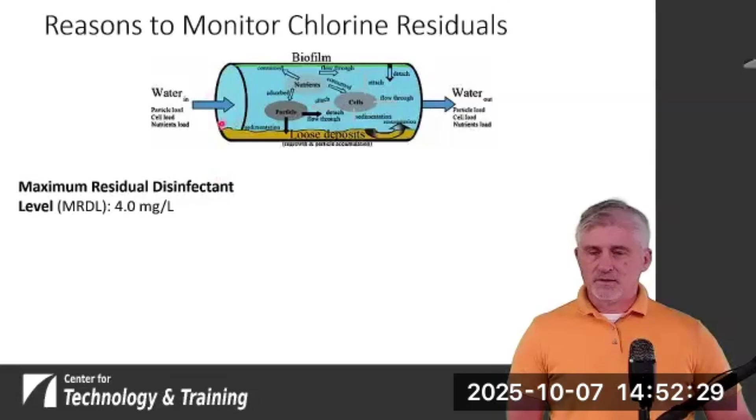But if we look at this pipe, we've got a lot of things going on here. Let's see if I can... So we've got water coming in - it's not just simply water coming in and water going out. We've got this biofilm, we've got deposits, we've got all this stuff going on.

So when we're applying chlorine, we're required to keep our residual disinfection level below 4 parts per million. If we don't do any monitoring, if we don't take any samples, we'll never know if we're below that. The other thing is we want to do it from an operational standpoint, because we want to make sure that we have at least 0.2 parts per million of chlorine if that's what we're applying, or 0.5 parts per million of chloramine.

This ensures that we have protection against those pathogens, so we're keeping our residuals up. If we don't monitor, we don't know if we have that.

We're also going to inhibit or try to reduce or slow down the growth of biofilm, which is important because that can end up causing bacterial issues and issues with disinfection byproducts. It's also an early warning sign.

If we typically have a chlorine residual consistently in our system and we're still applying at the same rate, and then all of a sudden we see that residual has gone down, that means there's something in the system taking up that chlorine. So once again, ensure that we have that minimum recommended residual, especially in areas that have dead ends.

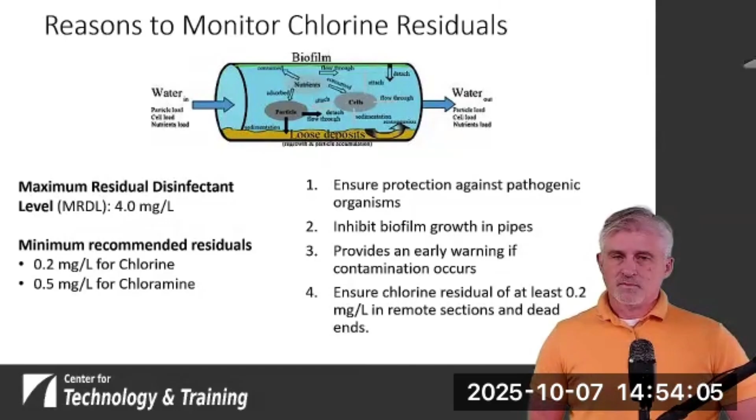So how do we go about monitoring our chlorine disinfection residuals? Most commonly people use the DPD method. We take this long-named chemical and use it as a reagent. We take a vial of our water, put this reagent in it, and if there's chlorine around, it'll come to a certain color.

It's typically a pink to red solution. We can use a free residual test for chlorine, or we can do a total residual test that will indicate our chloramine. If you look at these vials, it goes anywhere from no chlorine in the sample, to low chlorine, to high chlorine, to the point where we've got so much chlorine in the water that it even bleaches out the color.

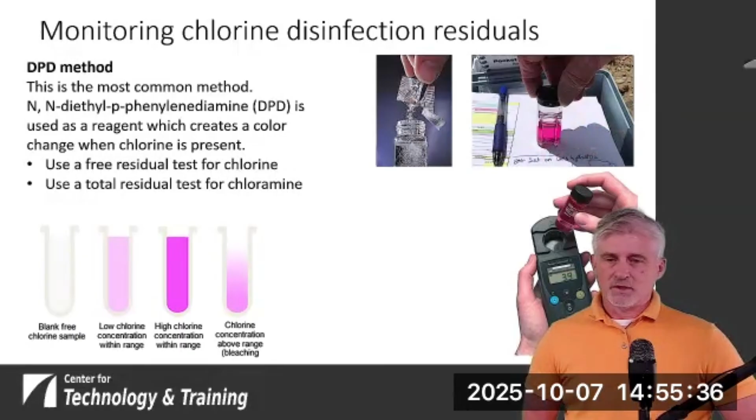This photo shows a vial of our water where we're adding in the DPD with these little pillow packs. The next shows what might be some chlorine. Obviously we see the pink color, so there's chlorine in that sample. We take that vial with the water and our DPD in it, we put it in our meter, and it gives us a reading.

It's kind of funny, these things are sensitive to light. Through time and light, the colors will dim, and what was a dark or bright pink will fade in color. So quite often guys out in the field will take these things and throw them on the dash of their truck, and they sit in the sun and fade out, and all of a sudden their chlorine residuals appear higher than they actually are.

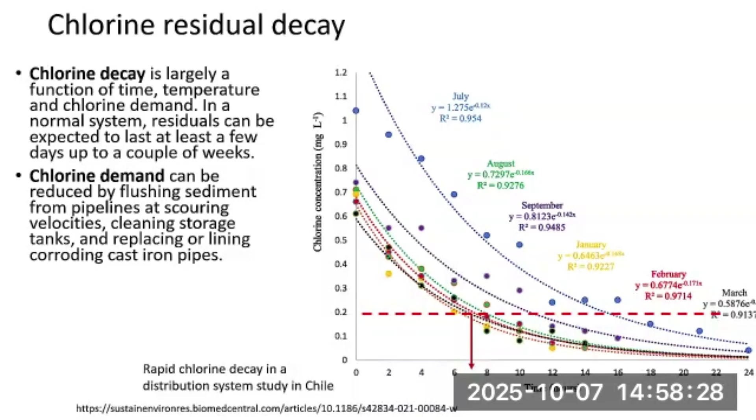How do we keep the demand down so we can reduce our residual decay? Flushing at scouring velocities, keeping our storage tanks cleaned out from any sediment, and cast iron pipes quite often have a major effect on chlorine residuals. So if you've got them and aren't going to replace them, you could line them, and that would also help.

Our water age, keeping that water fresh so we're not out here extended amounts of time, can be done by flushing and making sure that we're either mixing in our storage tanks or we're not short circuiting. So this shows the chlorine residuals and how they decay on a mapping system.

The darker areas to the left are where the higher chlorine residuals are - that's the source, where we're getting our water from. It shows that as we get farther away, and specifically as we get to these dead ends, our chlorine residuals decrease through time.

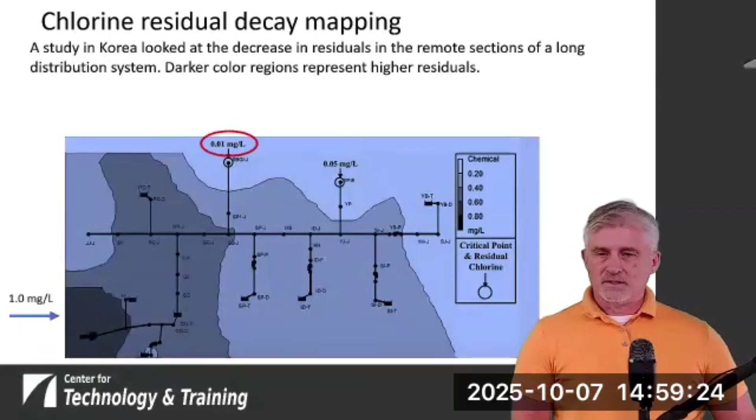So we had 1 part per million entering the system. Here at this dead end at the top, these two dead ends, we were down to 0.01 and 0.05 respectively.

So even though we had that coming in at 1 part per million, those areas decreased considerably below what we were looking for at 0.2 parts per million.

They did this study because they were looking at the idea of booster disinfection locations. We've got low chlorine out in the distribution system. Is it beneficial to have a point where we add chlorine and boost to get more chlorine out there? Obviously, that brings about concerns with disinfection byproducts, because once again we're adding chlorine to the system, and any of those organics that still remain out there could cause those disinfection byproducts. Flushing can help with residuals, we've said that over and over again. And there's always that case where maybe booster chlorination is effective.

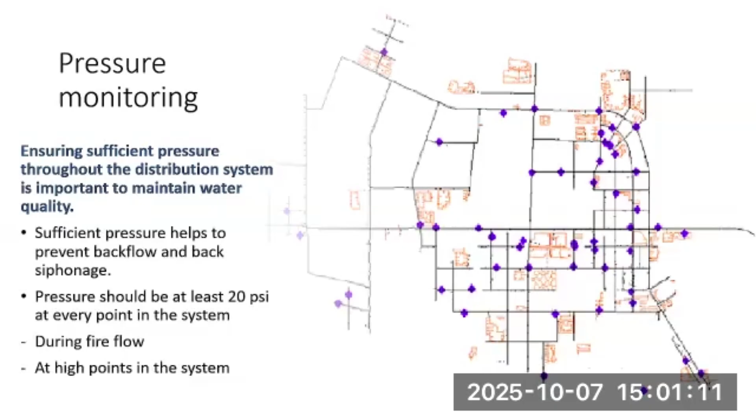So we can also look at monitoring our pressure out in the system. It's important that we maintain at least that 20 psi at every point in the distribution system, because if we don't, there's always the potential for backflow or back siphonage into our system. It's important for maintaining fire flow. And as we talked about, those cubes of water stacked on top of each other, the higher our system is, we're going to see reduced pressures because we have fewer cubes of water on top of that.

So let's look at the total coliform rule. The total coliform rule covers our requirements to collect our BACT samples and our chlorine residuals out in the system. Those things are based off of 2 things: our population, and then there's 2 things we really want to talk about - that's how we determine how many samples are required and what we do if we have a positive sample.

So if we have a positive sample, you're required to take at least 3 repeat samples within 24 hours at the original routine site and within 5 service connections upstream and 5 service connections downstream. That's a minimum if you have a total coliform positive.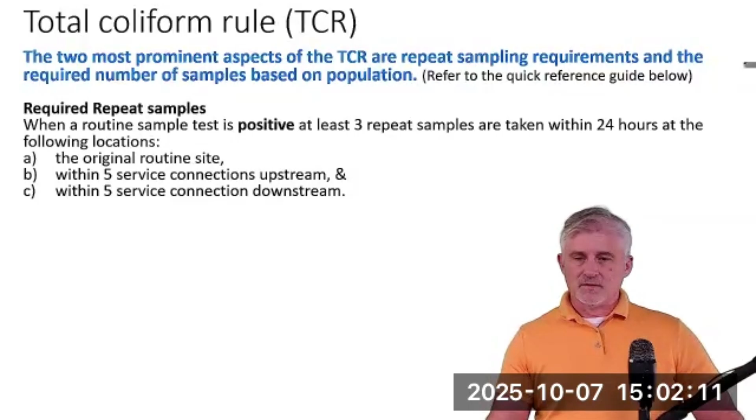So if you're a system where you only collect 1 routine sample per month, then you're going to be required to collect another sample. So you'll collect the original, the upstream, the downstream, and then another sample in the distribution system. And that location needs to be representative of your distribution system.

The other thing that's important to note is, as I said, the number of samples that you have to collect is based off your population. We'll show you a chart that indicates the populations and the number of samples that are required.

But if you're a system that serves less than 4,900 people, you can collect routine samples all on the same day. Whereas the systems that are larger and required to collect more samples have to collect them throughout the month. So this takes a bit of the burden off of small systems, that they don't have to collect several times throughout the month and maybe have to take them to the laboratory or mail them out.

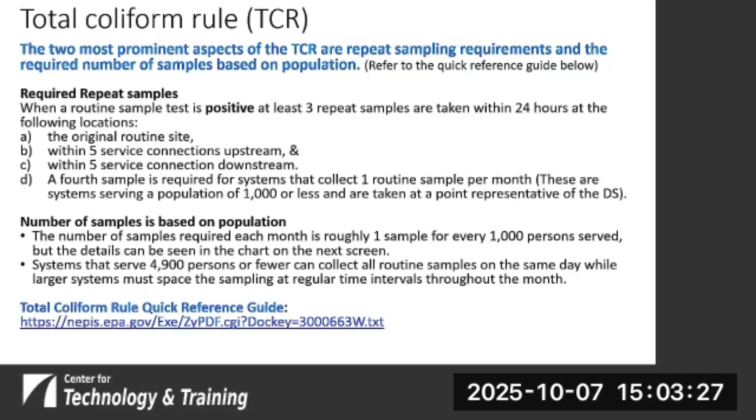So here's the link to that EPA guide. This is a very good one to have if you're having questions about the total coliform rule.

So for the revised total coliform sampling, we go to our revised total coliform sampling site plan. In that plan, we're going to identify the locations where we're going to collect our routine samples, and then also where we collect our repeat samples. So it identifies the routine sampling locations and the repeat sampling locations within 5 connections upstream and downstream.

So each one of these, you'll note that this system is chosen January and April. Looks like every 3 months they go through, they'll sample one location first, a second, a third, and then they start back over. So they do these 3 sample locations 1 sample per month for a quarter.

So for each one, they've identified their repeat sample locations, and it's important that those sample locations are representative of the system. So you can't bias it towards a certain area - you need to look at your system as a whole.

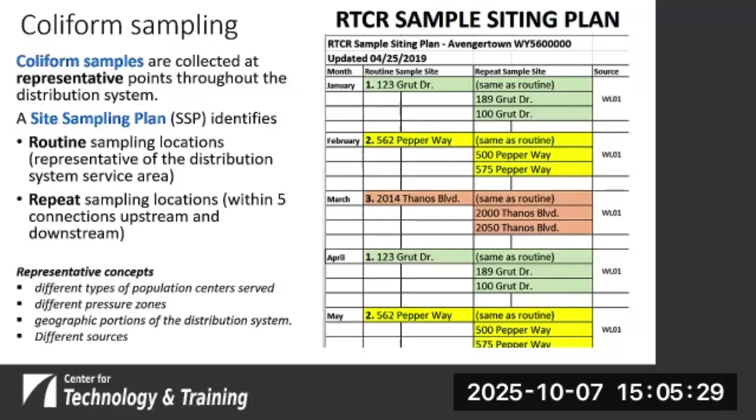If you're a system that's predominantly made up of residential, and you've only got a couple of commercial customers, it doesn't really make sense that you would use the multiple samples in that commercial district. You'd want to be able to spread those out through your residential areas.

You also need to consider different pressure zones, because with pressure zones, the water doesn't really go between zones. So each one should be looked at individually.

You've got significantly different geographical areas. If you serve 2 sides of a river and maybe there's only 1 or 2 river crossings, you should have sampling on both sides, things of that nature. And if you've got different sources, like wells that serve predominantly different areas of the system, you should look at those as locations.

So we're going to look at this in more detail. We'll look at this 123 Grut Drive and show whether this meets the requirements. So our initial plan, our routine site is 1, 2, 3.

If we're going to look at our downstream sites, we need to be within 5 service connections. So if this is our routine, we've got 1, 2, 3, 4, 5 - this 5th site just makes it, so this is within 5 service connections downstream. And if we look upstream, we've got 1, 2, 3, 4 - it's at the 5th site. So both of these meet the requirement.

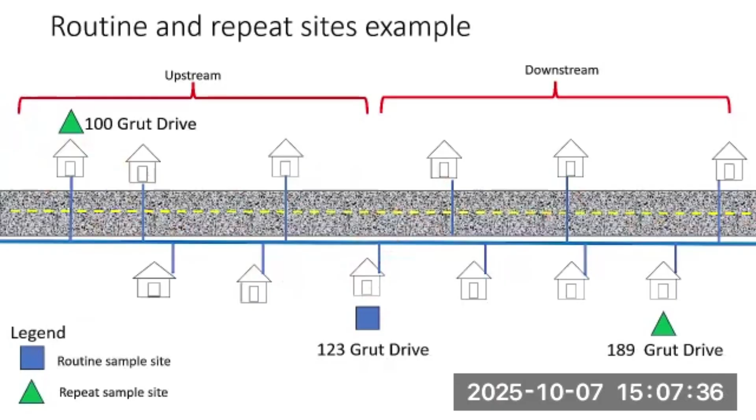Sometimes it's hard to explain what you mean by within 5 service connections upstream and downstream, and sometimes it's hard to tell. If you've got a loop system, you may wonder how do I know what's upstream and what's downstream. But if you're using this example, it really doesn't matter, because you're going to be within 5 in either direction, and that will suffice.

So let's look at how do we collect a coliform sample and what the bottle looks like. It's a plastic bottle with a seal around the cap - a plastic seal. It's also got a tablet in the bottom. That tablet is sodium thiosulfate, which is a dechlorinating agent.

So if you look at the cap, it should be sealed. If not, use a different bottle. If you're collecting a sample and something goes wrong, throw it out and collect a different sample. It's really important that you get water representative of the water in your system, and that you don't cause a contamination where there wasn't one.

With that in mind, you want to take the cap off. Keep the cap facing down so you don't flip it up and let things fall into it. Hold that lid or cap down while you collect the sample. You want to fill it to the 100 milliliter line, and then when it's full to that line, replace the cap.

There's a sodium thiosulfate tablet in the bottom. If it's missing that, then you shouldn't collect the sample.

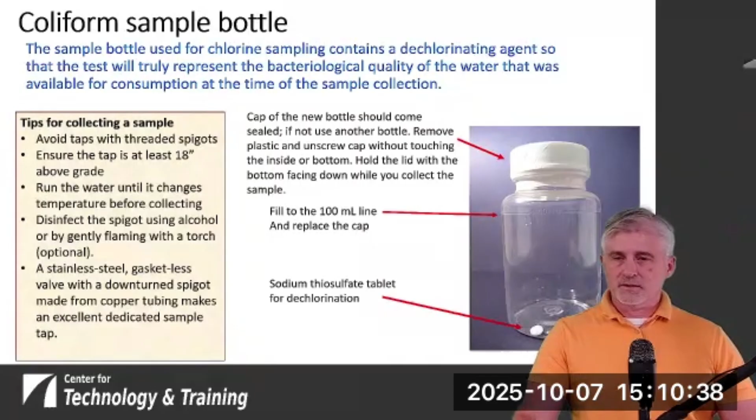Stainless steel gasketless valve is ideal. The turn down spigot and small diameter copper tubing, gooseneck copper tubing - those are all great sampling taps.

So we've got the total coliform rule and the revised total coliform rule. What's the difference? E. coli was added as an MCL to the revised total coliform rule. The idea is that we have a find and fix approach - we identify what caused that sanitary deficiency, what caused the problem that led to the total coliform or E. coli positive, and we fix it.

So there's a level 1 assessment and a level 2 assessment. A level 1 assessment puts the onus on the utility - they're required to investigate any sanitary deficiencies that contributed to 2 or more total coliform positives in a month. That's for a system with less than 40 routine samples. If you collect less than 40 in a month and 2 come back positive, you've got to go through this process. Or if you're a larger system collecting 40 or more routine samples, if 5% of those are positive, you've got to go through the process.

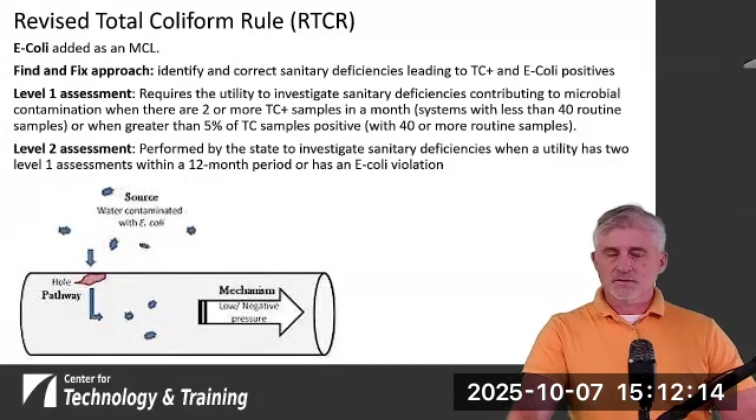If you go through that process and continue to have issues - having to do 2 level 1 assessments yourself within a 12-month period, or if you have an E. coli violation - then the state regulatory agency gets involved and does their own investigation. That's how this progresses.

So what are the concepts behind the revised total coliform rule? In order for there to be contamination, there's got to be a source. There also needs to be a pathway, a way for that contamination to get into the system - a mechanism that causes that contamination to enter the system. We need to find out what those things are to correct it. There's a quick reference guide for that.

The lead and copper rule is a little different. Some of these ideas go against the coliform sampling approach, but the rule established action levels, and action levels are different than maximum contaminant levels. The action level is based off the 90th percentile level of all the tap samples collected. So that 90th percentile - if you had 10 samples and rated them from lowest to highest, your 90th percentile is the value of the 9th highest sample. That's both for lead and copper.

That sample is a first draw, so it's different from total coliform sampling in that we want to capture the water that's first out of the faucet, and the faucet also has to be not used for at least 6 hours - so there's a stagnation period there.

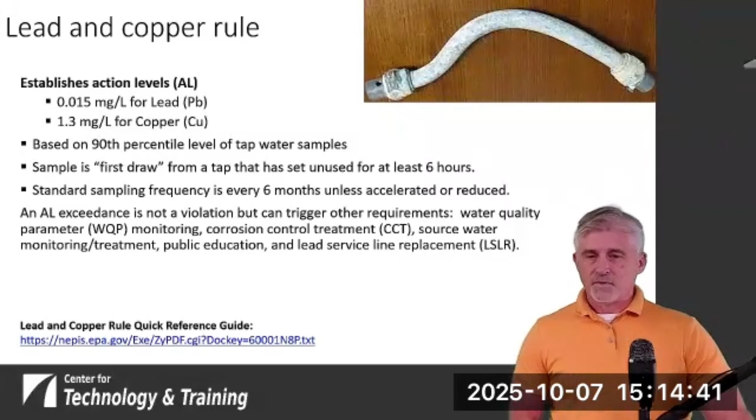An action level exceedance is not a violation, but it can trigger other requirements. You could have to do water quality parameter monitoring in your distribution system. You may have to do corrosion control treatment, a study to determine if it's necessary. You may need to monitor your source water or treatment. You may have to do public education. If you've got lead service lines, chances are you'll be doing lead service line replacement - probably already doing that if you have them anyhow. There's a link to the lead and copper rule quick reference guide, and a link to the lead and copper rule revisions.

Lead and copper sampling in tiers - here's where we figure out how many samples we have to collect based on population. They're grouped into small, medium, and large systems. The smallest system, under standard monitoring for lead and copper sampling sites, has to have 5 sites for regular routine, and reduced stays the same. You have to collect 1 water quality tap sample, and reduced stays the same. As systems get larger, they start to give you a bit of a break - if you're doing well and results come back good, you can reduce those sampling numbers with regulatory approval.

Now, where do they want us to collect these samples? So the idea is it's single family first. We're trying to find the worst possible location.

EPA has deemed that the most likely to have lead are going to be single family homes with copper lead solder constructed between '83 and '88, lead pipes, including lead goosenecks or pigtails, or lead service lines. So those are our highest priorities.

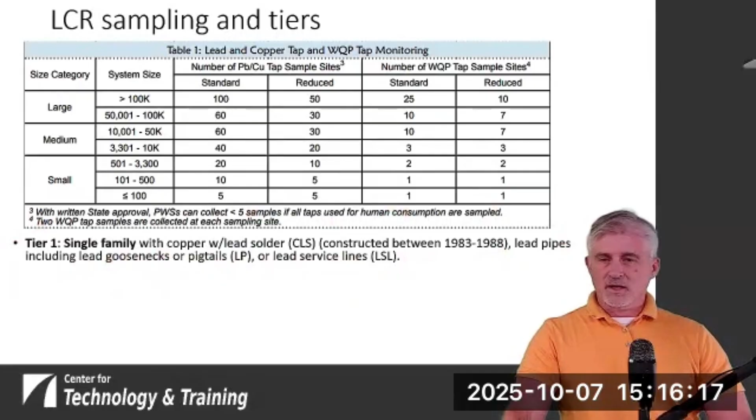If you have these, you have to use them. If you don't have enough of those, or you don't have any, then you can make those up by extending that to all building types. So it could be commercial or multifamily, but with the same criteria.

And then if you use up all of those and you still need to collect samples, you look at tier 3, which are single family structures that have copper with lead solder constructed before 1983. And if you go through all your sites and you don't have any of these tiers, or you've taken what you can out of there, then you can go on to the other. You need to collect samples that are representative of your system.

Now, under the disinfection byproduct rules, these identify the sampling requirements for those. That's, as I said, based off a locational running annual average. Our THMs form when chlorine reacts with organic compounds in the water.

We've already covered that. Now, bromate, if you're using ozone, then you would have to collect bromate samples, because ozone reacts with naturally occurring bromide in the water, and that can result in bromate formation in your distribution system.

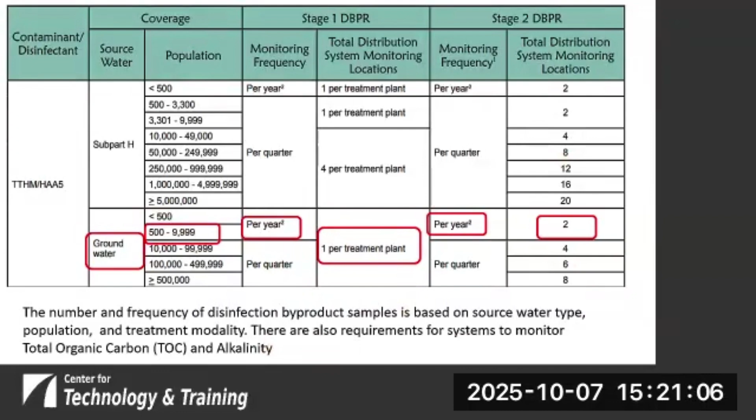There are requirements to monitor the system for TOCs and alkalinity as well.

Chain of custody, it's important. When you fill these out as you collect your samples, you've got a bunch of information you need to have: the sample identification, date, time of collection, the people or sample source, preservatives, and what you want it tested for. Each time it's transferred, it's signed off, dated, and timed from person to person. Also note what preservation and storage methods you utilized.

The lab that receives it verifies the chain of custody, records the dates, and checks to make sure the samples weren't tampered with. The chain of custody must be maintained as part of the official record, along with any shipping receipts. So this is an example of a chain of custody.

You can see the information required: the company and address, who did the sampling and signed off on it, information about the sample—whether it's a grab or composite sample—what analyses you're asking for, and the total number of containers. There's a relinquish section where people sign off that they received it, with date and time, plus information about number of coolers and temperature. A lot of these things are important, like the times and temperatures.

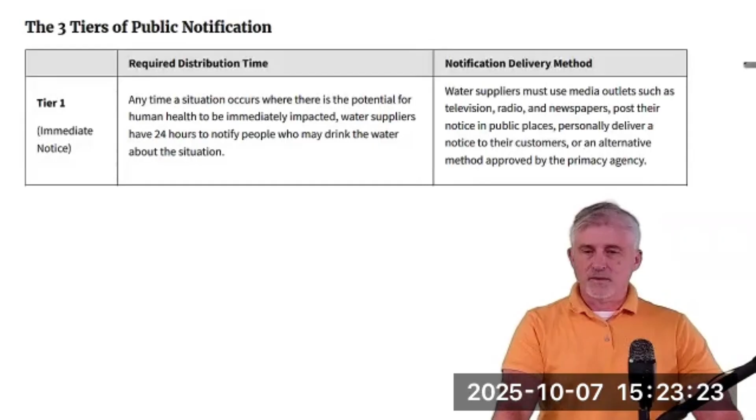There are three different tiers of public notification. The most important are tier 1—situations where there's potential for human health issues and people could be immediately impacted. These require notification within 24 hours. The delivery methods are very prescriptive and required: you need to use all methods possible at your disposal—television, radio, newspaper, notice in public places, and any other ways, including social media in this day and age—but it needs to be done quickly so we notify the public of major issues.

Tier two notifications are less stringent, for less severe issues. You may have had an exceedance, but it wasn't something that could cause immediate harm to human health. With that, you may be allowed to notice through the media, through posting, or through the mail.

The least serious one is tier 3. It doesn't impact a drinking water standard—you're not violating a drinking water standard. Quite often it's that you failed to either take a required sample on time, or failed to notify the regulatory agency of that. The requirements are similar to tier 2, but since you can wait up to a year, you can often include that notification in your consumer confidence report.

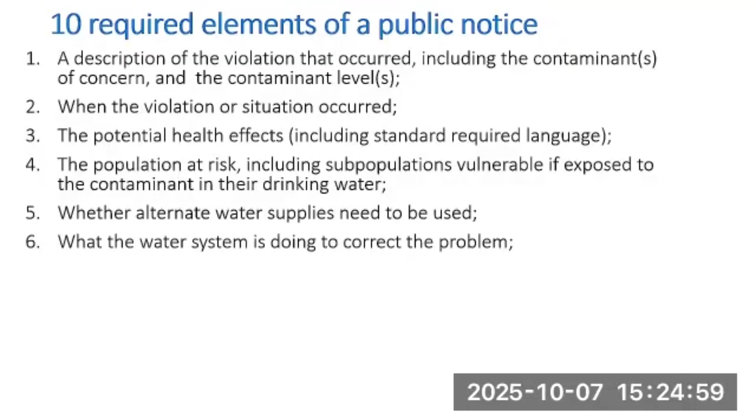There are 10 different elements required in a public notice: a description of the violation, including the contaminants and when it occurred, the potential health effects to the public, whether there are subpopulations specifically at risk for that contamination, whether they need to find alternative water supplies such as bottled water, and what the system needs to do or is doing to correct the problem.

These are all required as part of the public notice: this information, what actions consumers can take to protect themselves, when we expect the problem to be resolved, and how customers can contact you as the operator to find more information. You always want to try to extend that to more people than just the notice, because some people come from out of town and work in the area—you want to make sure everybody gets notified.

So there's information on the public notification rule. Once again, tier 1 notices must go out as soon as possible, but no later than 24 hours of learning. You should also contact your regulatory agency, because they can assist and they need to know. Fecal coliform and E. coli violations fall into that category.

Nitrate or nitrite MCL violations, if you're adding chlorine dioxide and exceed your maximum residual disinfectant level, that violation requires a tier 1 notice. If you're a surface water treatment plant and you've exceeded your maximum allowable turbidity level, you would need to do one. If there's a confirmed waterborne disease outbreak or emergency, you need to let people know about that, and any other violations identified by the primacy agency.

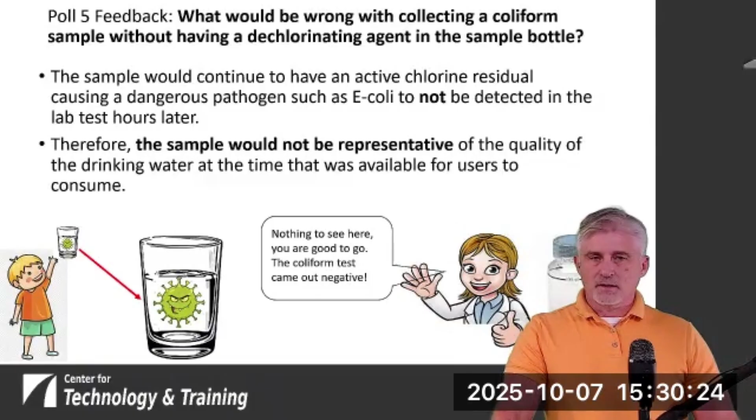All righty, so what have we covered today? Disinfection, dosages and feed rates, disinfection byproduct prevention, sanitary surveys, sampling and monitoring. What takeaways, what things do we want you to leave with? Water age management, and it can be dealt with in a multitude of different ways. It's important to make sure that we don't have issues. We can do it through proper tank turnover, through flushing, having the right size tanks and mains.